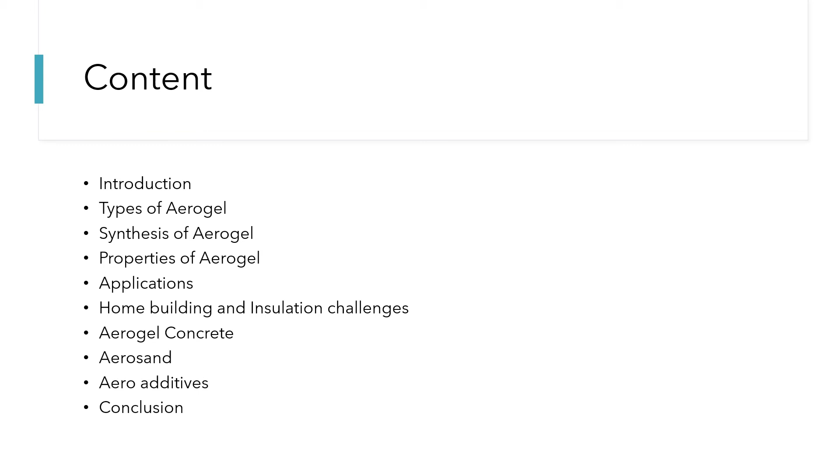In this presentation, we are going to talk about different points revolving around aerogel. First of all, we will introduce what aerogel is. Then, we will talk about the different types of aerogel that exist today. After that, we will tell the process of synthesizing aerogel, and after that we will talk about the wide use of applications of aerogel. Then we will talk about aerogel in home building and insulation challenges and see how aerogel concrete comes into play. Then we will talk about aerosand, and finally we will talk about aero additives and conclude this presentation.

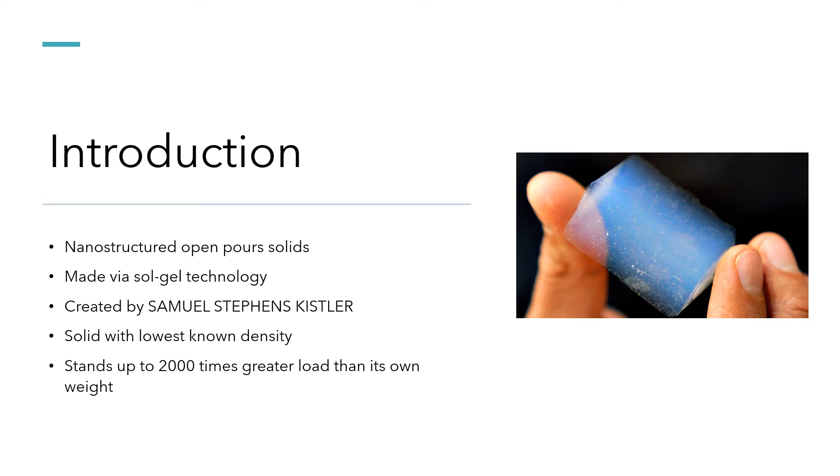Aerogel is a synthetic porous ultralight material derived from a gel in which the liquid component for the gel has been replaced with a gas. The result is a solid with extremely low density and extremely low thermal conductivity, but it stands more than 2000 times its weight. Aerogel was first created by Samuel Stephens Kistler in 1931 as a result of a bet with Charles Learned over who could replace the liquid in jellies with gas without causing shrinkage. It is basically made via the sol-gel technology, which we will discuss later in this presentation.

There are different types of aerogel which exist today, and they are oxides, polymers, carbon, and cellulose or starch. Metal oxide aerogels are used as catalysts in various chemical reactions or transformations or as precursors for other materials. Aerogels made with aluminum oxide are known as alumina aerogels. These aerogels are used as catalysts, especially when doped with a metal other than aluminum. Nickel alumina aerogel is the most common combination.

Organic polymers can be used to create aerogels. Seagel is made of agar, and cellulose from plants can be used to create flexible aerogel. Carbon aerogels are composed of particles with sizes in the nanometer range, covalently bonded together. They have very high porosity and surface areas. They are often manufactured as composite paper.

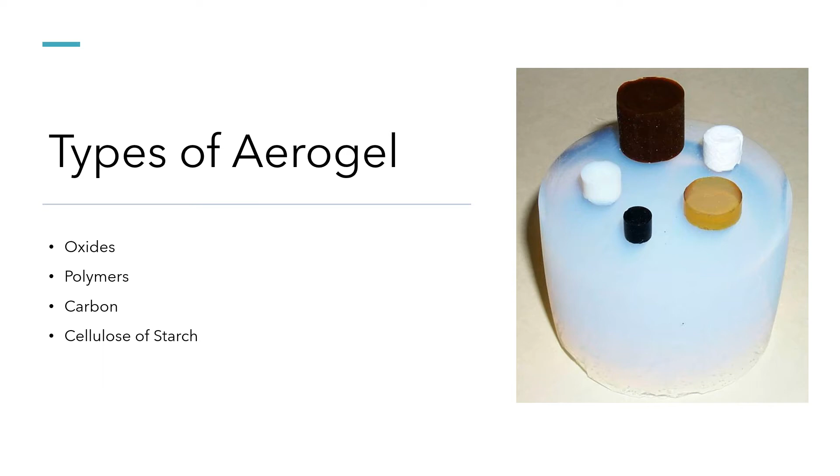Now, we will discuss the process of synthesizing aerogel. Aerogel is made by a process called the sol-gel process, where sol stands for liquid and gel is a wet solid-like material. A sol can become a gel when the solid nanoparticles dispersed in it can join together to form a network of particles that spans the liquid. This requires the solid nanoparticles in the liquid, which are constantly bouncing around in random directions because of temperature, to bump into each other and stick together when they do.

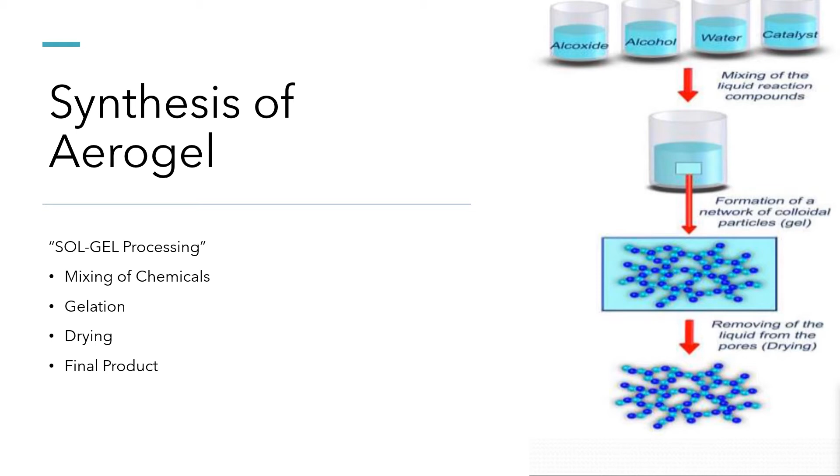As the sol becomes a gel, its viscosity approaches infinity and it finally becomes immobile, so it becomes not able to fill its container, although it might still wobble back and forth. The transition from sol to gel is called gelation. After that, it is left to dry until we obtain the final product, the aerogel.

As we've said, aerogel consists of mostly air. Thus, it has very low density. There are many more properties of aerogel, which are high porosity, large sound absorption, low sound velocity, low thermal conductivity, variable refractive index, and flexibility. Also, it doesn't react with melting metals up to 950 degrees Celsius. It has a huge internal surface and its surfaces can be functionalized. It has very high fracture strength and it's hard.

There is also the so-called Knudsen effect, and so aerogels may have thermal conductivity smaller than that of the gas they contain, as they're made up of air. This is caused by the Knudsen effect, a reduction of thermal conductivity in gases when the size of the cavity encompassing the gas becomes comparable to the mean free path. Effectively, the cavity restricts the movement of the gas particles, decreasing the thermal conductivity in addition to eliminating convection. The applications of aerogel are many and useful.

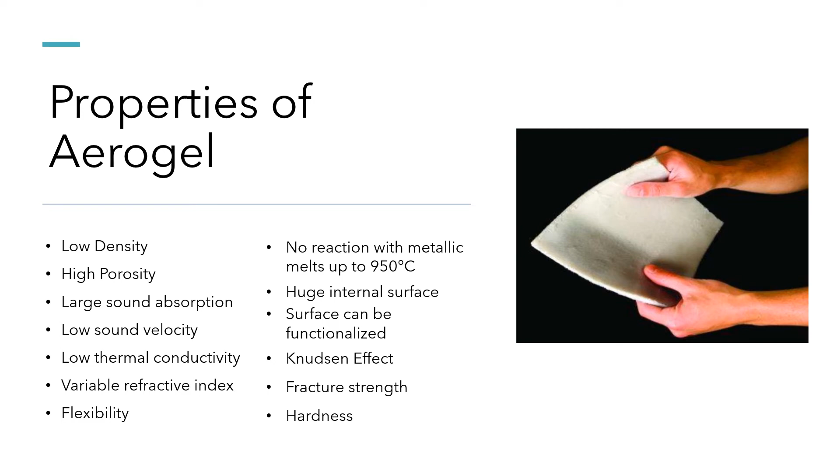It is used in thermal isolation like in houses or cars, where if we are for example in the summer and you need to prevent heat from coming inside to maintain a cold reasonable indoor temperature, using aerogel, a very good isolation material, is a very big deal, as it doesn't only provide the necessary isolation, it also saves costs by lowering the electricity and the cooling or heating consumption, thus lowering the expenses. It is also used in electronic components, foundry technology, architecture, superlight composites, cosmetics, and even pharmacy.

It is also used in different fields like space and sportswear. Spacesuits use aerogel to protect astronauts from the very high temperatures in space near the sun and foreign planets. It is also used in sportswear as it's very light and provides a very good isolation.

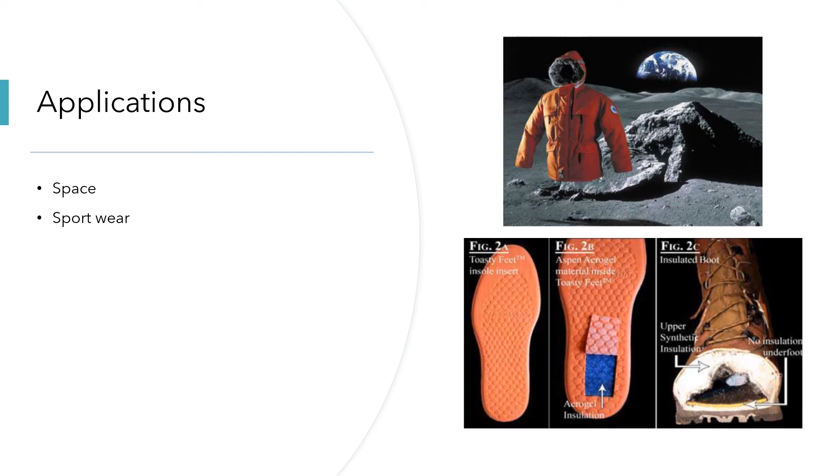There are many challenges that come to mind when building a house or isolating a room or some space, some of which are energy savings and the regulation of indoor climate, as we've discussed earlier. You also need a lightweight material which is also very strong. You also want a very high fire protection, as for example, God forbid, your kitchen blows up and you don't want the rest of the house to go down. So you want natural construction materials, and so you need a material that protects you from fire, and it's a natural construction material.

Also, you want to live in your new house for a very long time, and the very long period problems that appear during this time are fungi colonization. You don't want a material that can cause your walls to be colonized by fungi, thus giving a bad smell and color, and worse, inviting bugs and different animals to your house, which will make living there very tedious.

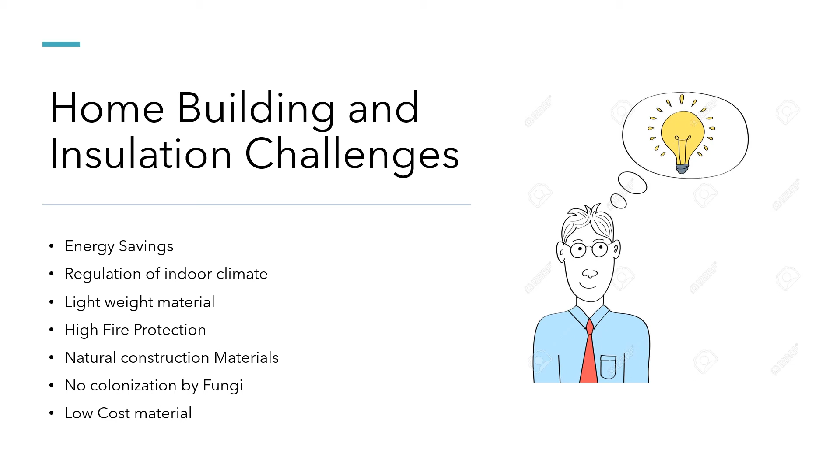You want all the features mentioned in one material, which also doesn't cost much. Aerogel has it all, specifically aerogel concrete. With not only the features mentioned earlier, it is also very cheap. Aerogel concrete is a composite which is made from hydrophobic aerogel granulate and an inorganic binder or matrix such as gypsum, plaster, and cement. But all this luxury comes with some challenges, like the extreme density difference to work with and the bonding strength of the aerogel matrix interface.

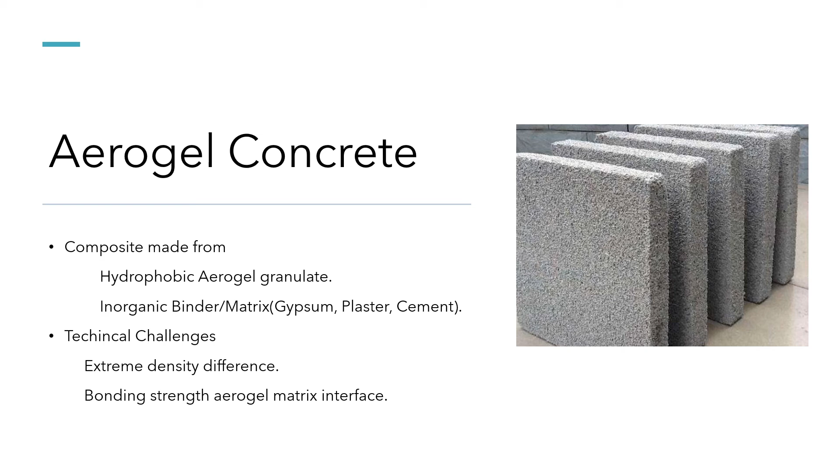Not only in building, aerogel is also used in foundry applications like RF aerogel as a binder, which we will discuss later. And it's also used as structural panel and an aerogel wrap as shown in the pictures.

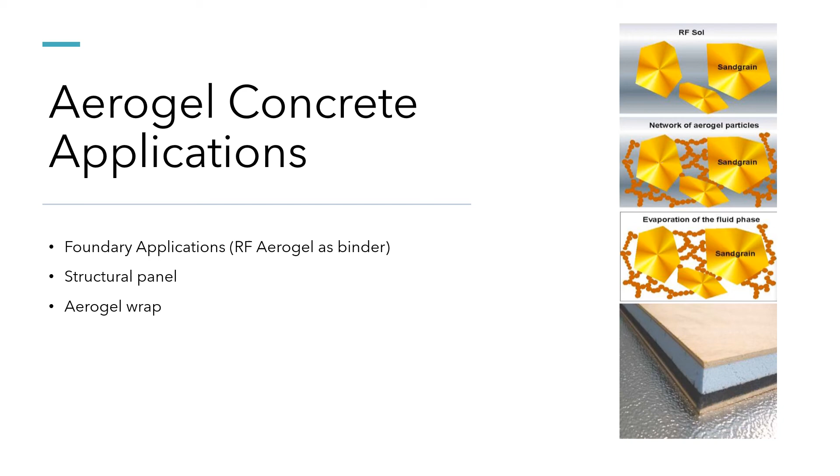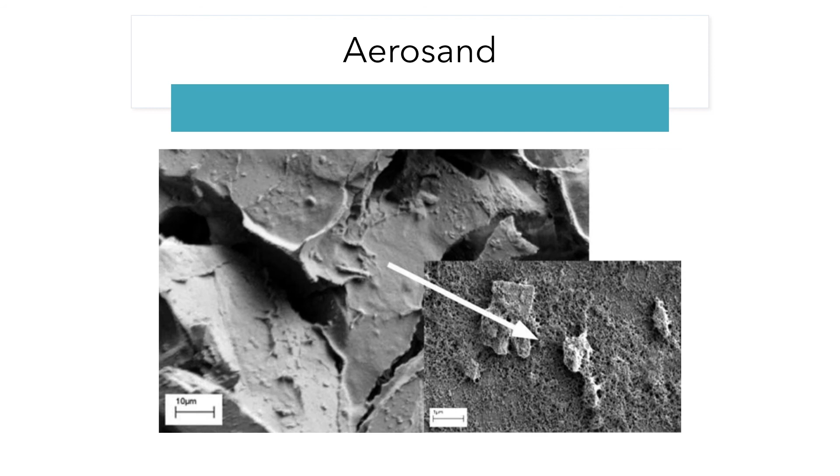Now let's move on to aerosand. So organic aerogels used as a binding material for sand cores and molds can lead to so-called aerosands. The bonding bridges consist of a nanostructured open porous aerogel instead of a conventional polymer. The aerosand properties feature an easy core removal, a very low thermal conductivity, smooth surfaces, and no shrinkage.

It doesn't release any gas during casting, where if you did casting before, you know that gas release is a very big deal and might ruin the cast if not ventilated properly. It also has a high bending strength, which depends on the inverse square root of the average sand grain size.

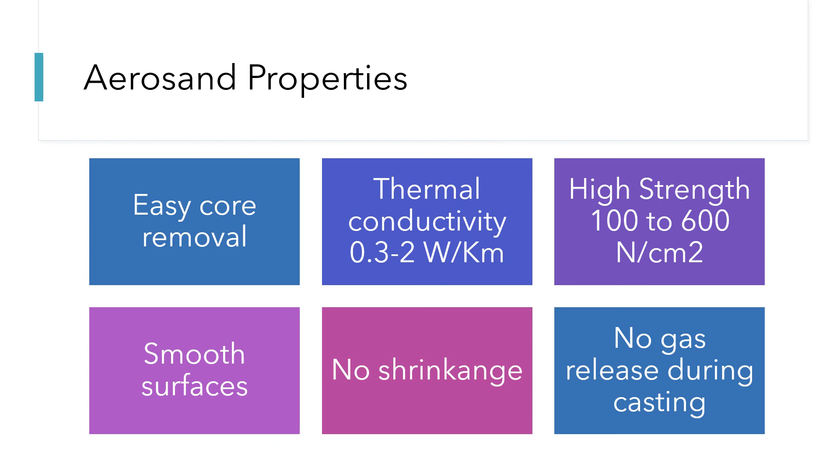Moving on. Since many years, aerogels are specially developed for foundry applications. The newest developments are aero additives, nanostructured aerogels in granular form. The addition of 0.5 up to 5% of aero additives to any common sand binder system leads without any further changes to enormous improvements of the cast part quality of the sand cores.

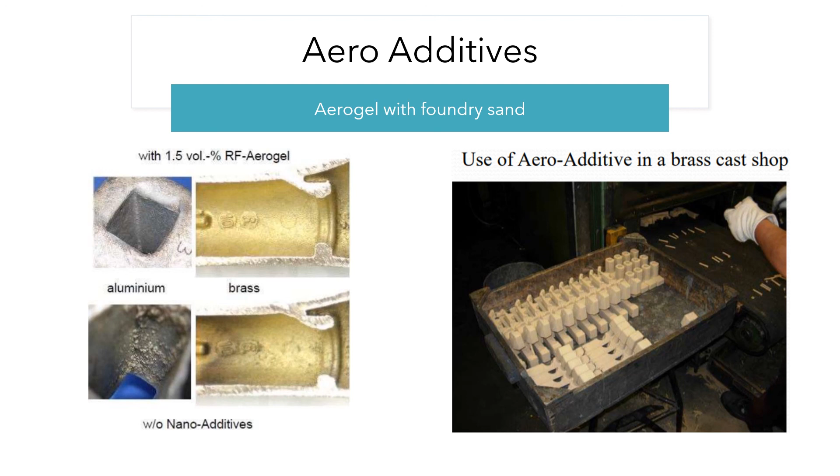Above are the brass and aluminum castings with aero additives, and below are the brass and aluminum castings without aerogels. And so you can see the difference between using an aerogel in casting and not using an aerogel.

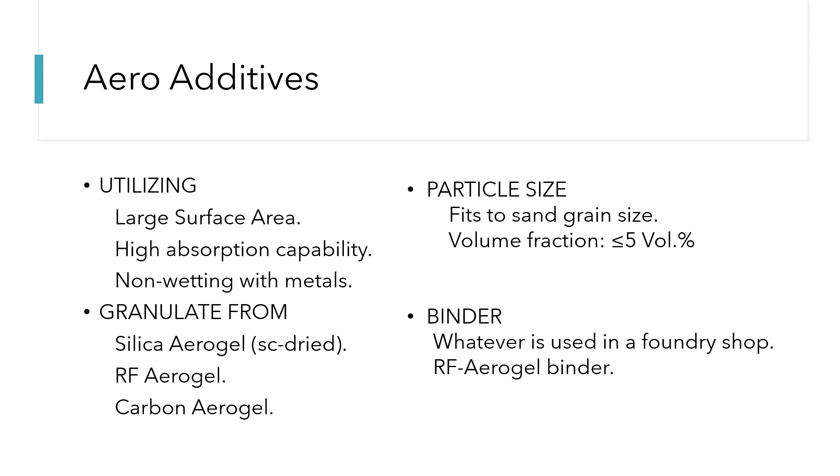Aero additives utilize a large surface area, a high absorption capability, and non-wetting with metals. They granulate from silica aerogel, RF aerogel, and carbon aerogel. Its particle size fits to grain size, and its volume fraction is less than or equal to 5%. As for the binder, whatever is found in the foundry shop is used, like an RF aerogel binder.

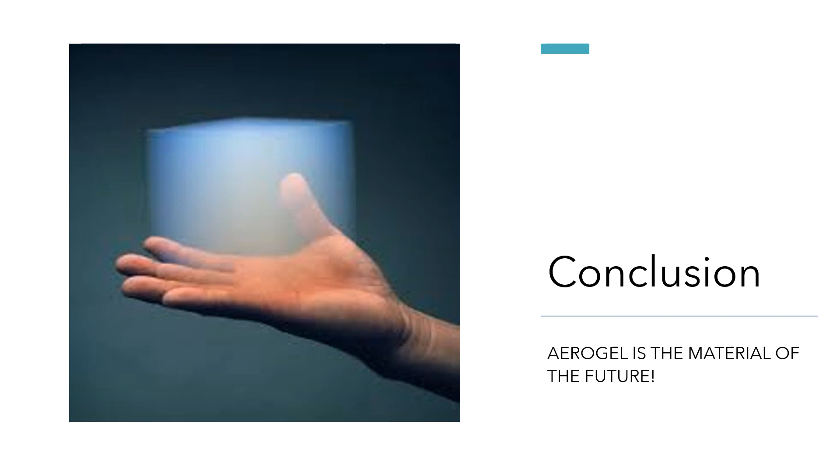To conclude, all the information on aerogel points towards a very brilliant future with these materials and technologies, potentially opening new possibilities to the world that were never available before.